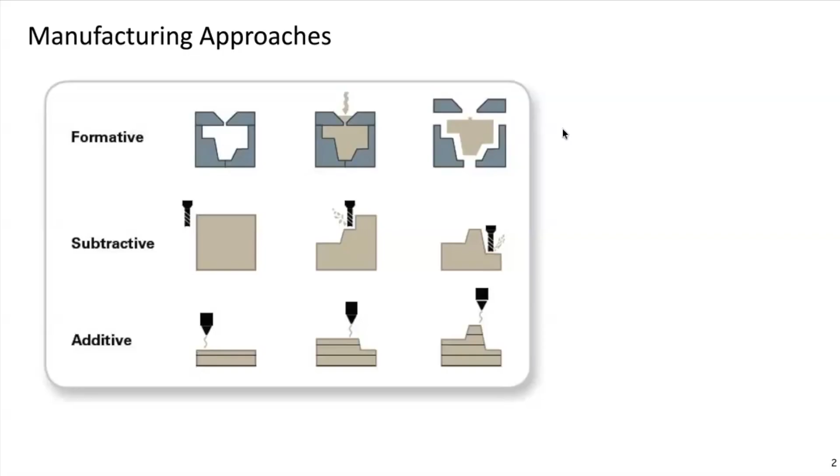I think at the end of the day, what's most distinguishing about additive manufacturing is making things you can't make by other techniques. That's the real power of this. And also think about this, it's pretty simple: you don't buy stuff you can't make. If somebody is not able to make it, you can't buy it. It sounds simple, but what that means is product design is often done with the tools that are available, and it's hard to push innovations when you don't have these kinds of capabilities.

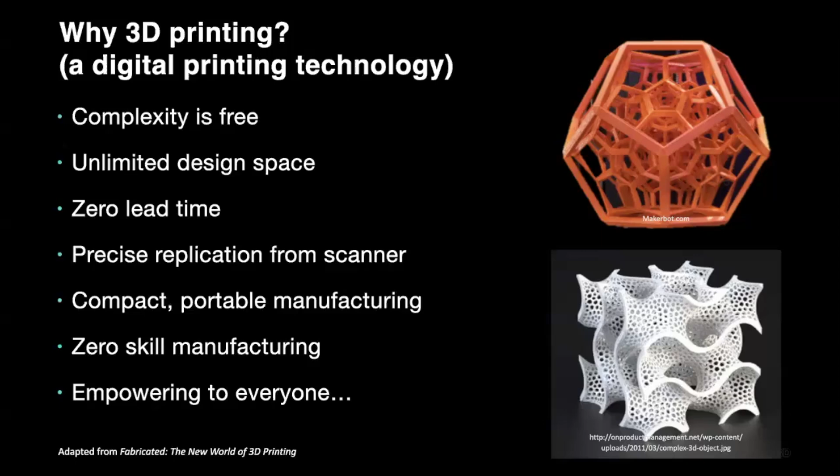So when you think about why 3D printing is so powerful, I think of two themes. One is making the unmakeable by traditional techniques. The other is scaling bespoke products to the millions, where each one's a snowflake, each one is unique. Think about dental products and other things having that scale. Those are the two use cases that I think are the most powerful.

And we ended up figuring out an idea to do this. It really started with a breakthrough in material science, which harks back to the first chapter of my independent career in making fluoropolymers. We basically designed a 3D printer that...

...has a window at the bottom of a reservoir that's like most windows. It's optically transparent and lets light in. But this window is also permeable to oxygen. Oxygen is an inhibitor to free radical polymerization. So you think about what is a material that you're all familiar with that's optically transparent and permeable to oxygen. Some of you may be wearing them now: contact lenses. So this is a cousin to contact lenses.

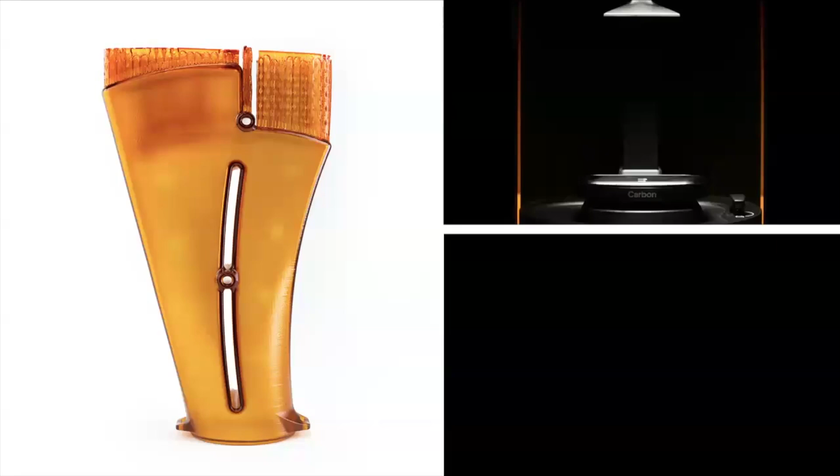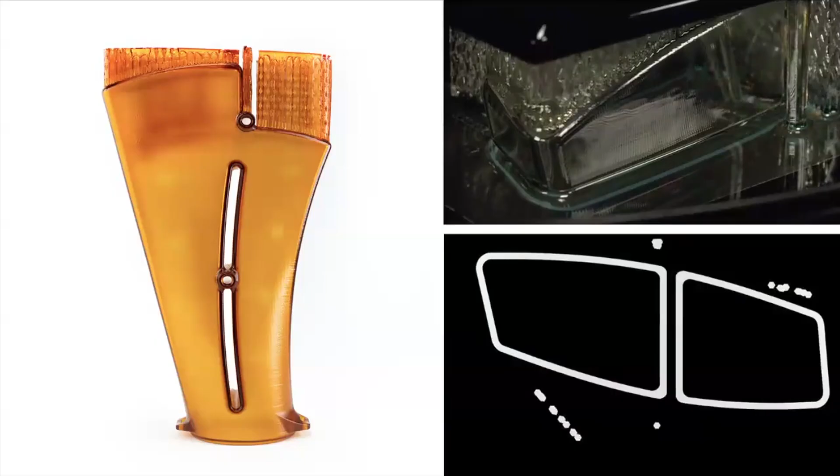What happens is we're going to lower a platform into this reservoir, and it's going to submerge underneath a partially UV curable liquid. It's going to get very close to the window, and then we're going to start projecting light, a pattern of light which represents a cross section of the object on the left. That first layer is going to cure asymmetrically. It's going to bond to the platform, but not bond to the window because of the oxygen coming through the window. There's actually a gap between this part and the window that's submerged under the resin. As the object pulls up, resin is getting sucked into the gap between the part and the window.

And this allows the printer to go 100 to 1,000 times faster than a traditional 3D printer. Most 3D printers, it would glue to the window, and then you have to fracture it off to create a gap to bring in more resin. So this is a mechanism for resin renewal at the interface of the part.

Here's an actual image. This is optical coherence tomography. We put a contrast agent in the resin so you can see the flow of liquid that's forming, and you see there's a negative pressure in the middle of the part as it's drawing resin into the gap. That gap is about 20 to 50 microns, depending on how we run the printer, and it allows resin renewal automatically. This allows a printer to go substantially faster.

We've worked out all the details. It's complicated. It requires a software control system, and it requires hardware that's remotely controllable with software. And you can imagine so many things differ depending on which resin you're using.

So we have over 50 different resins now, because you need resins with different mechanical properties. You need resins that are elastomers, rigid materials, flame retardant materials, impact resistant materials, different dental materials. Every resin's got a different viscosity, a different optical density, different mechanical properties. Every resin requires its own batch of software.

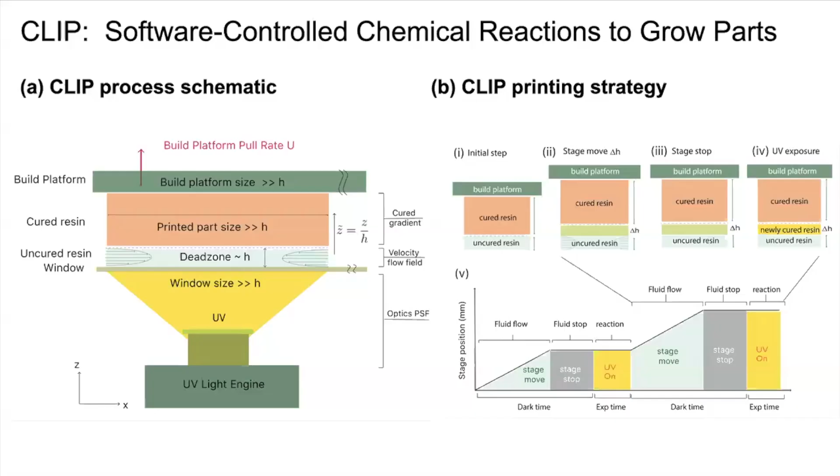Now you can imagine as you pull this part up and you draw liquid into the gap, that's kind of like drawing liquid up a straw. So atmospheric pressure plays a role, and we have to control all these printers because the printers operating in Denver operate differently than the printers at sea level. So in order to do that, you need connected products. All the telemetry is coming into headquarters, and we're able to keep the printers running this way.

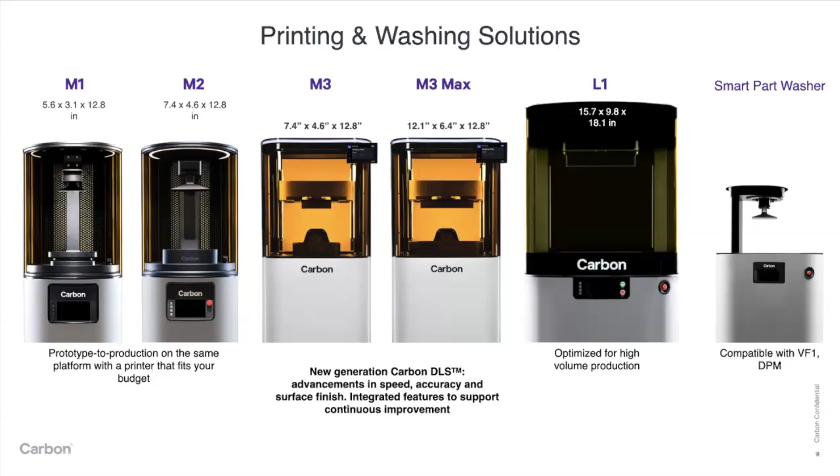So this is a suite of printers that we've commercialized at the company Carbon. And this is not an AI image, this is a real image. You have to say those things now, right?

So you get the point of having automated hardware allows us to run all day long. And that's really valuable. So that's a little bit about the process and the hardware.

Let me talk a little bit about the chemistry. How many people have bought epoxy glue at your local Walmart? And what does the packaging look like? It's like two containers, right, usually with one plunger, maybe two containers. They get the stoichiometry right. This is step growth polymerization chemistry, and it's all weighed out so that even engineers could do the chemistry. And I say that as an engineer and a chemist.

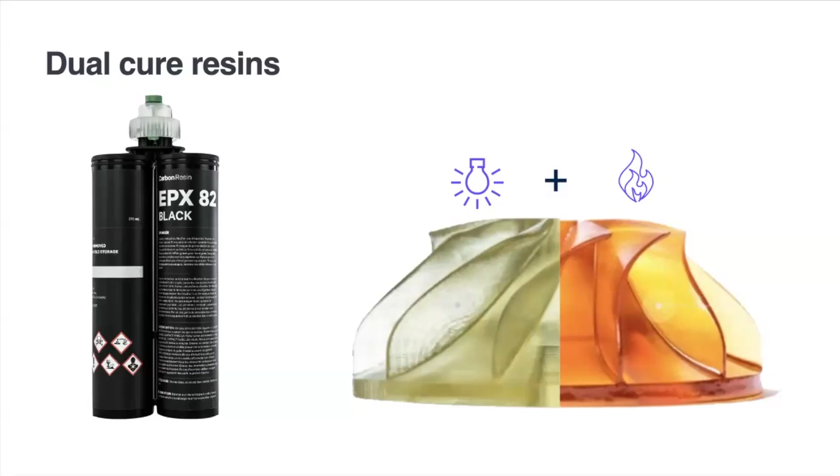But that's how you get most great polymer properties. Light is not a good way to make most polymers, but it's a good way to shape a polymer. So we basically developed orthogonal chemistry—we have chemistry that's going to go on with light, and then we have other chemistry that's going to go on by that mixture, and they can run independent of one another, so they're orthogonal.

Just to show you one chemistry slide here: we basically have about 10 volume percent, and only about 10 volume percent of the chemistry is light sensitive, free radically activated, and that will set the shape of the part. So we'll print a part, and it's mechanically not very strong, it's fairly weak. Then we get the excess resin off the part, and then we induce the second stage chemistry—here, epoxy chemistry. It's basically a solid state polymerization in the form of the part, and that's how you get great material properties.

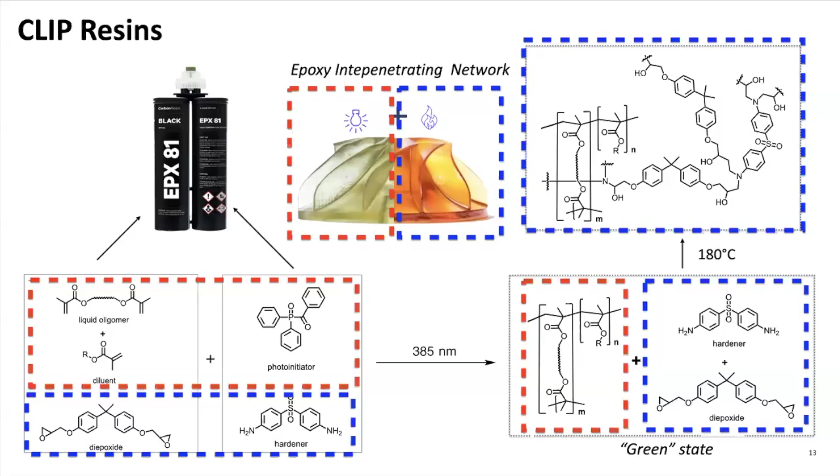So we basically broke it into two problems: shape the part with light, and do a second stage solid state polymerization. And this works like a champ. This is how we get amazing properties in lots of different areas. So I want to just quickly show you some products—Adidas running shoes. There's another great video here.

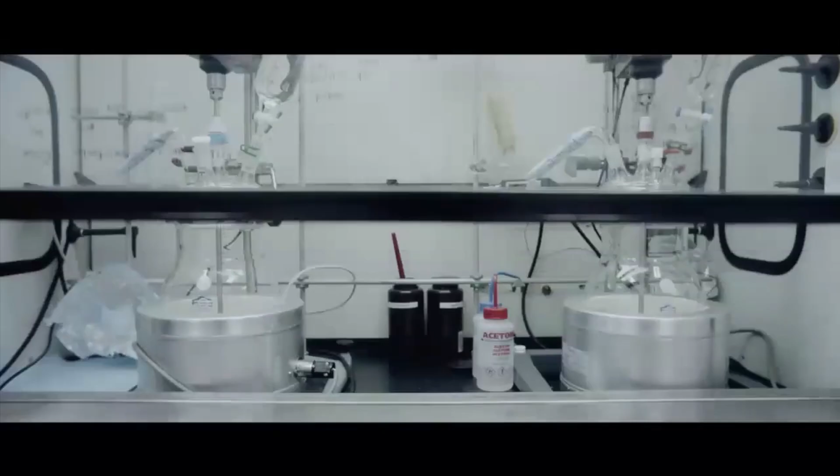When we first started with the idea of Futurecraft, because it's a guidance, it's set up on a path. It's a mindset and it's a philosophy to try things. We're always bringing in new influences, new ideas, new collaborations. 3D printing, for example, was one of these new technologies that really had unlimited possibilities. The initial problem was, okay, can we actually make a running shoe out of 3D printing material that really works and works well? So when we started thinking about doing 3D printing, we wanted to use liquids because liquids give you the most flexibility in material design.

I think of light as a chisel. Light triggers the solidification of the liquid, but oxygen inhibits it. That allows us to have the object grow. What's really interesting about this collaboration with Carbon is we're seeing convergence of a completely new manufacturing technology. We're going to scale it with the best industrial partner in business. We're able to deliver tens of thousands and move into hundreds of thousands and into the tens of millions. Now that's clear in front of us. We have this amazing opportunity to innovate the printing process. The liquid rising and growing in that context can give you new design thoughts you've never had before and new performance capabilities that wouldn't be possible by traditional manufacturing.

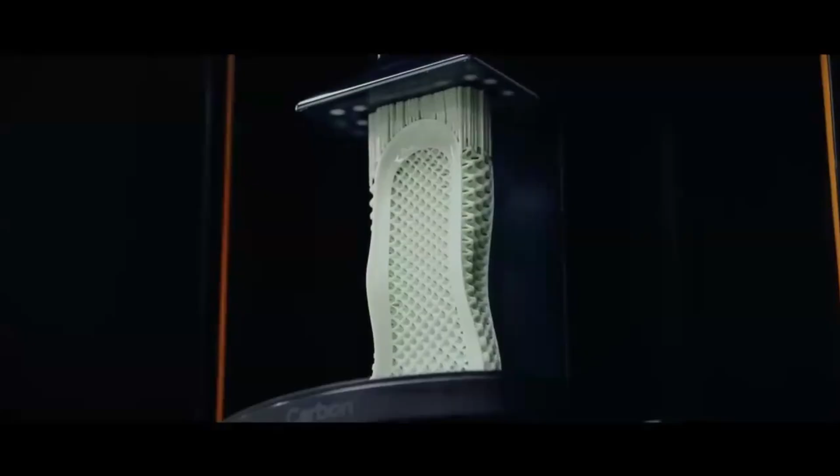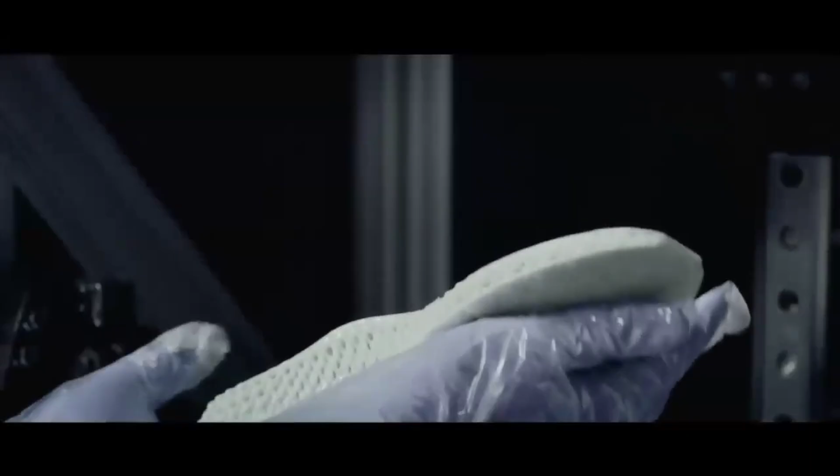This three-dimensional mesh structure, it's a lattice, it's a matrix, it's a web of individual elements. Each one of those little elements is tuned specifically for a purpose. These lattice structures behave quite differently than anything we've dealt with before. They're much different than foams. Now we have every individual area of the shoe to work with, which is a completely new horizon for us and a new venture. If you really want to make a shoe that's a size 9, that same shoe for someone who's 180 pounds versus 100 pounds has got to be different. We can go in within every single cell and engineer that exact cell to do exactly what the consumer needs it to do just for them.

That's fascinating. That's going to change how we create products and certainly how consumers experience products. And I think that's how we see something like Futurecraft 4D playing into the life of an athlete. I would say this is just the very beginning, and it sounds silly and cliche, but who knows, man? I don't know what's next, and that's what's great about going to work every day.

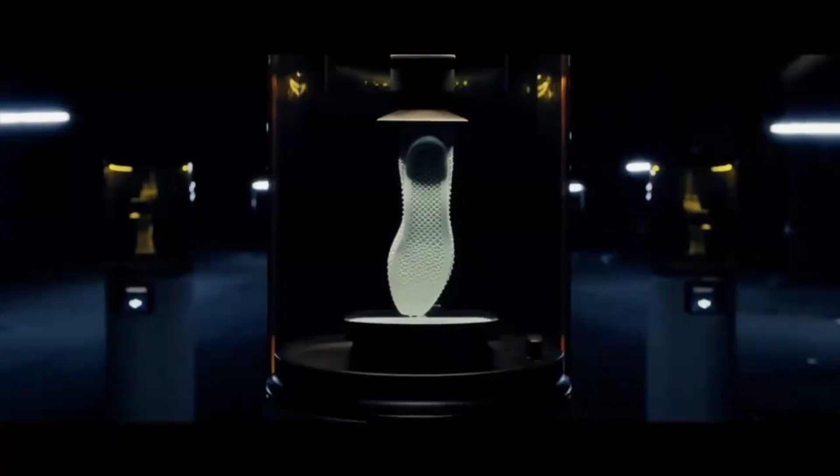Adidas is great at marketing. I just.

Yeah, so it's coming out in all different brands now, in different types of shoes. These were just launched. The whole shoe's printed now, and it's been a lot of fun. And when I spoke in that video back in 2017, tens of thousands to hundred thousands to tens of millions, I was speaking it into existence. We weren't close to those numbers, but we knew we could. We knew it was fundamentally possible, but we had a lot of work to do. And we were literally in the thousands at that point. So that talks a lot about projecting something of where you can go. And now we're in the tens of millions.

And when you think about that kind of conversion, the shoes, when they first launched, were $300 a pair. And all the chemicals were bought at low volumes and they were expensive. But as you get to larger volumes, you knew where the math was going to go. And so it's trajectory, having the trajectory to understand those dynamics. Now you can buy them for less than $100 a pair. And at less than $100 a pair, you can sell 50 million shoes a year. Those sorts of things.

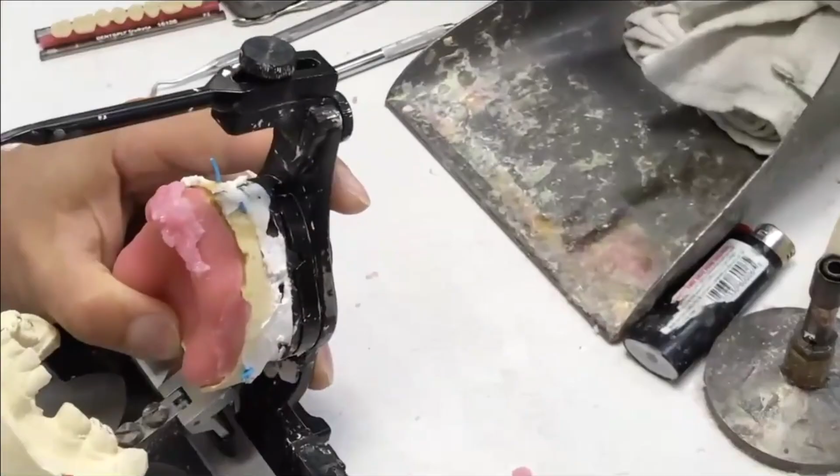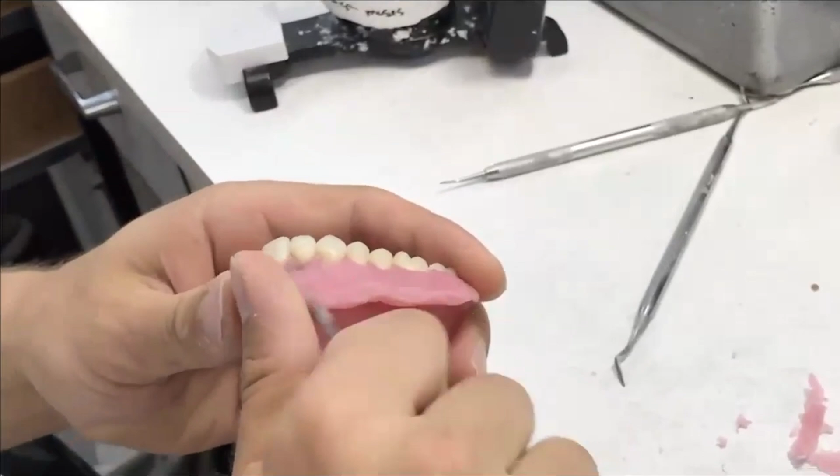The VA is the largest provider of dentures in the United States. And I don't know if you've ever seen dentures made. This is the way they're made. They're handcrafted. They're expensive. And it typically takes 8 chairside visits to get them right. Because you try them on, they get adjusted, but you just look at this process. And I want you to watch this process because you just get a sense of this is how it's done. And again, it's 8 chairside visits.

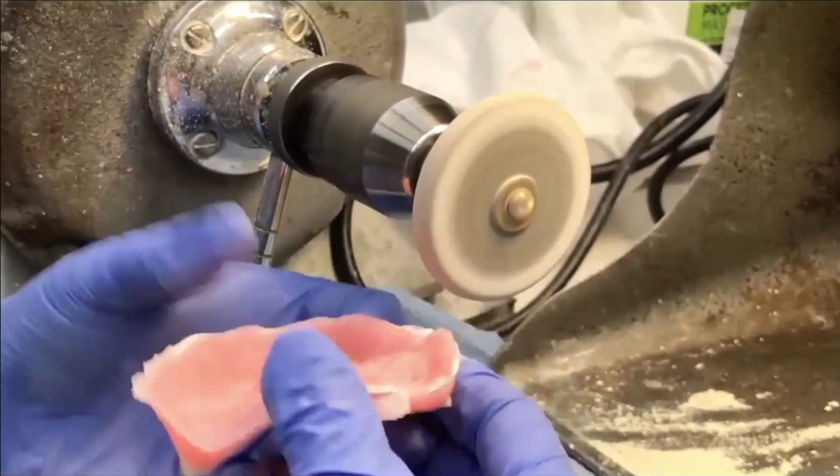And I was giving this talk up at MIT, and one of the department chairs there, she started crying during my talk, because her mother's got Parkinson's disease and she lost her dentures, and she had to go back into that chair 8 times. And it's a huge toll on people to get this done and get these milled. But there's a better way. And here's a description.

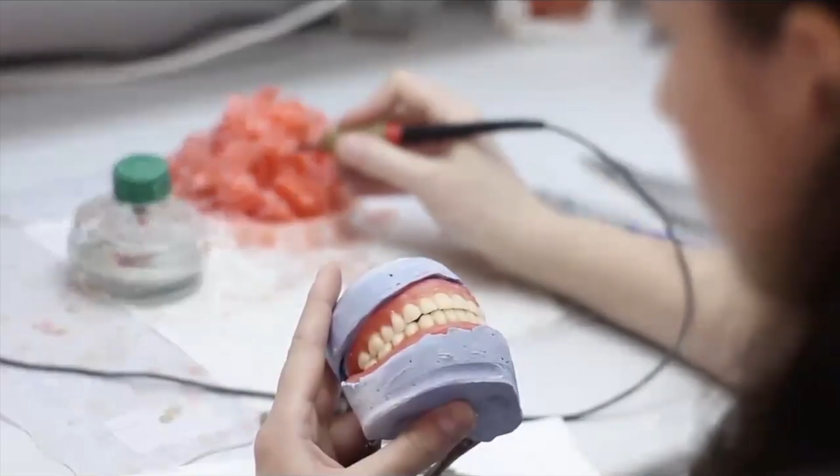For the last 45 years of delivering dentures or longer, there was always an unknown. When patients are looking for a denture, the biggest complaint is that they don't fit. And think of denture making as a craft. I need a craftsperson. And Carbon can do it.

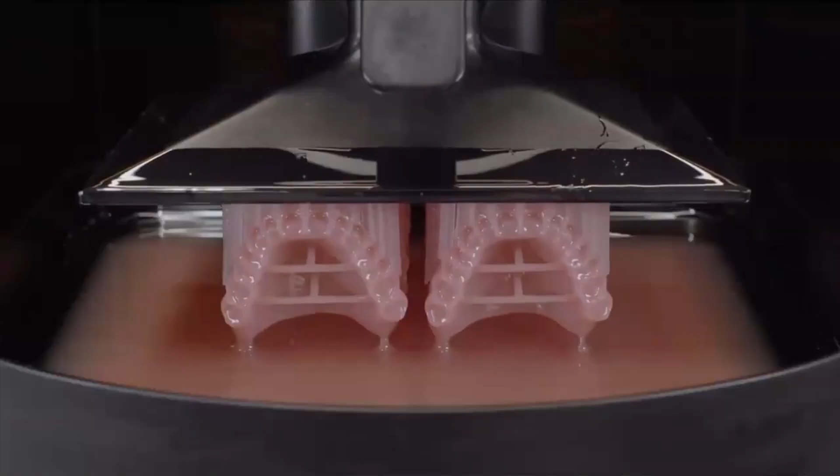Taking a lot and making it less is what a mill is. Taking nothing and making it something is what a printer is. We don't want to make molds, we don't want to make jigs, we want to make final products. And when you make final products from the milling process, it is far less economical than when you make final products from the printing process.

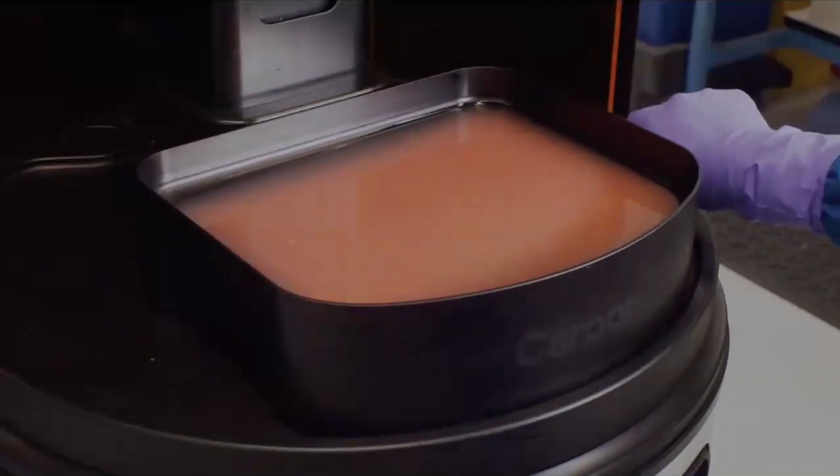There's 3 basic things. There's fit, there's comfort, and there's function. 3D printing brings all of those together. The accuracies and fit, comparatively speaking to what was done even 5 years ago, has become so much higher in impact for patients and for clinicians across the country. For something that makes dentures day to day, it's transitional, it's transformative. A lab powered by Carbon will allow me to make probably the best denture ever made.

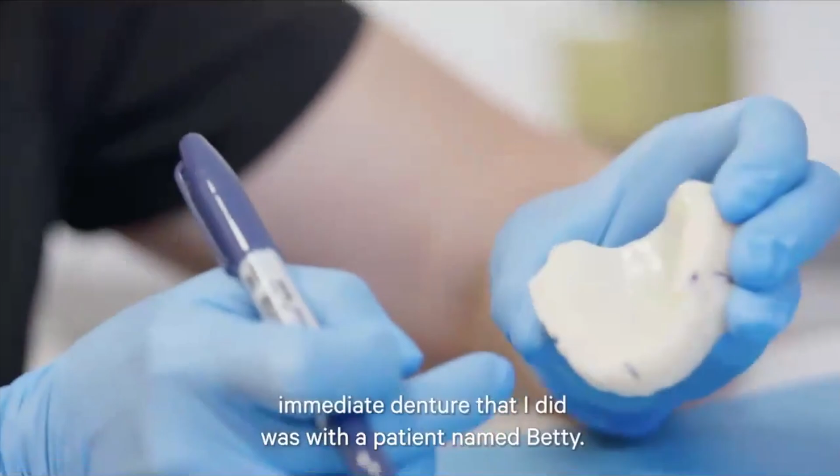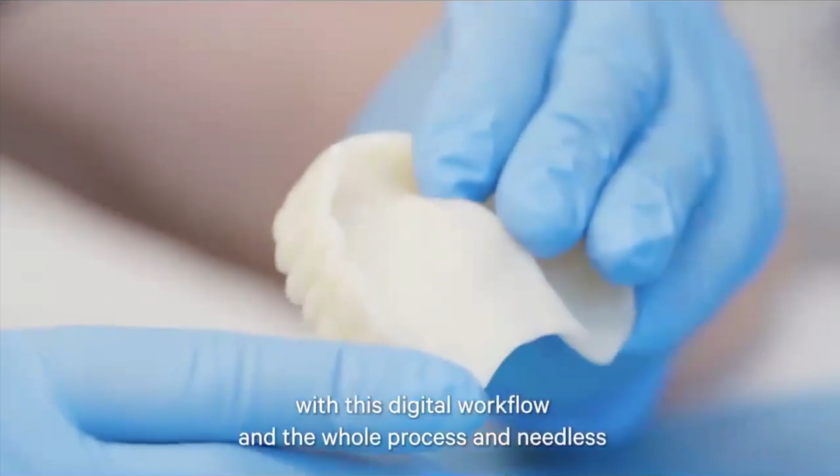My first immediate denture that I did was with a patient, Betty. I was still kind of a newbie with this digital workflow and the whole process, and needless to say, models matched, everything went like clockwork perfectly. She comes back 24 hours later for her post-op, and she's standing in front of this big mirror we have in the office, and she looks at herself, and we're looking at her like, Betty, you are beautiful.

And she just starts to cry. And my whole office, we're all holding our breath because she's staring at her face with her beautiful teeth. And then she says, no one's ever told me.

So it's all done with intraoral scanning. Some people still do impressions and they get digitally scanned, but they're all done with a wand now. I'll pass one around. Don't get wigged out, it's not mine.

But the teeth are printed separate from the base. We've got 5 different color bases. Sometimes you put ceramic teeth in there too, sort of a la carte, but it's transformative. It's significantly cheaper and it's the same materials made better and made more accurately. It's really transformative.

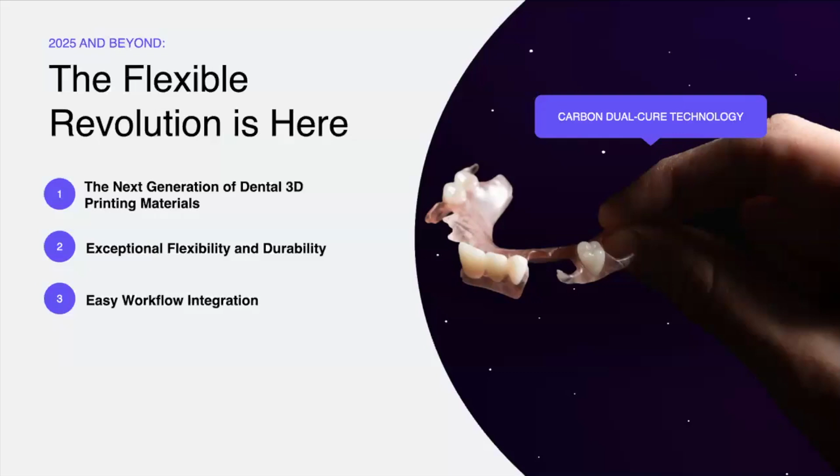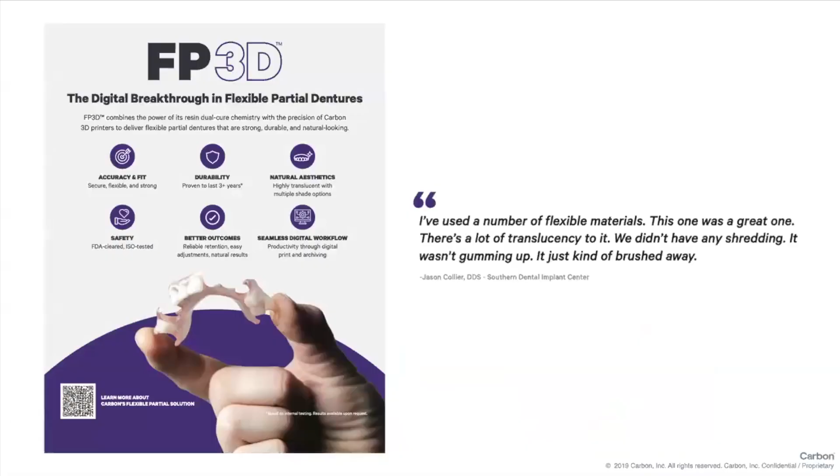And the new resins now, these dual cure resins, give you the mechanical properties to now do partial dentures, removable partial dentures. And this is the biggest part of the market. So the advances in materials open up these kinds of constructs. And we've got the entire portfolio now to cover this entire market. So just to walk you through that, I'm going to skip that video.

Helmets and head protection. This is me reliving the glory days of high school football. Your head gets scanned. They're bespoke products. Software creates the scan. The lattices are generated by finite element analysis models tied to mechanical properties of elastomers. Helmets get ranked. They actually get ranked by the NFL at Virginia Tech. Virginia Tech does all the rankings. It's an amazing facility. 7 out of all the top helmets are made with our technology.

And at the NFL, they're bespoke. This started off as a small market. They do 250,000 helmets now a year. So it's really gotten into peewee and the whole 9 yards, pun intended. And again, back to the video and the positioning. I thought being here at Arkansas, I got to show this video here.

If you love football, so much more than that. It's the hope of 2 small towns separated by a patch of grass under lights on Friday. It's generations of families who sing the fight songs, wearing the right shade of red. It's the cold of aluminum bleachers and the heat of century-old rivalries. It's the 2-a-days in August and the sting of catching a pass in January.

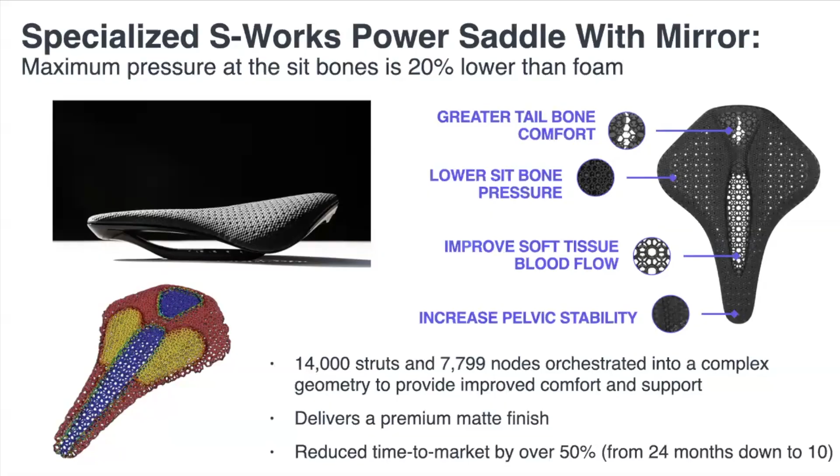It's really eye-opening. And in other areas where this matters medically. I've never had to, but when you have to live in a chair all day, every day, you need to be comfortable. It's a nice addition to life.

My name is Brian Minnick. I'm the CTO and co-founder of Cool Seat Company. We developed the world's most advanced seating systems. When we started the Cool Seat Company, we realized there was a gap in existing technology. Through our development cycle and research, we identified Carbon as a suitable candidate to replace foam. And so with the Cool Seat technology, we've been able to address some of those concerns.

We got a sample pack from Carbon. It wasn't until I held it in my hand that I was like, oh, this is it. This is what I'm gonna make a seat out of. I've been on a variation of a Cool Seat for the last 4 years, and I don't want to sit on anything else. What I found with the Cool Seat was it didn't take long to break in. It contoured very well to my profile, and then it stayed there.

I've been on this cushion at least 2 years. I've traveled the world, I've been all over the place. In that time, I've never had to worry. It's very comfortable, but it's also very stable. If I give a push, I get a stronger push because my body's not shifting as I'm on it.

Quality of life is why we started this company. The end user has to make so many choices of what they can do throughout their day, and having to think about your cushion or how long you can be on it or the restrictions it has. You want to eliminate that concern from the user, so it's one less thing to have to worry about. You literally forget the benefits of not having to think about that piece of equipment. In fact, my mind is quite free, which is something that I have yet to experience in any other piece of equipment I use.

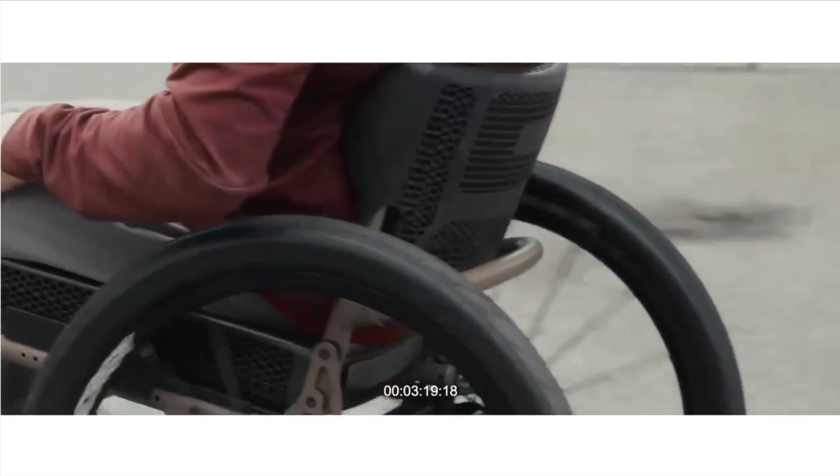The environment that Carbon's created allows small companies such as us to embark on a journey like this. It traditionally wouldn't be possible in conventional manufacturing. Without Carbon technology, this is impossible.

So what I wanted you to see here is this: there's a tenet in entrepreneurship in Geoffrey Moore's book, Crossing the Chasm, about the bowling alley. You know, what is that first bowling pin you want to knock over that cascades into the other pins?

It started with Adidas running shoes, right? Great brand, visibility, expensive products in the beginning, but as scale grew, the cost came down and allowed other things to fall. And so then bicycle saddles and helmets and now seating, and now it's going even further into high volume consumer products.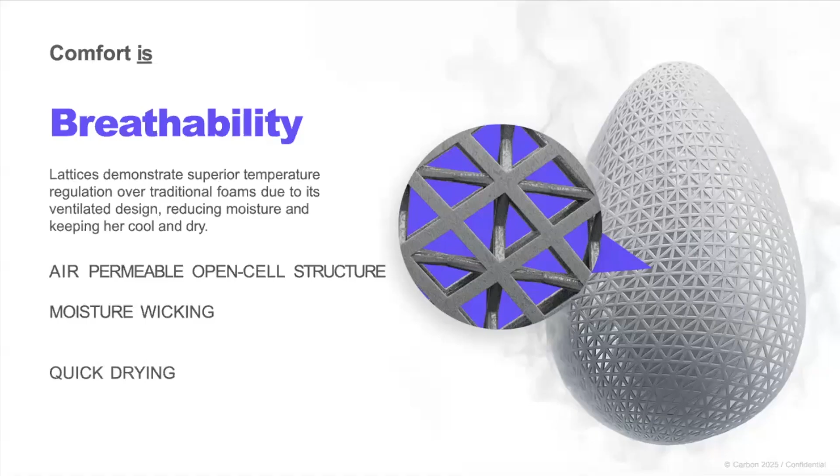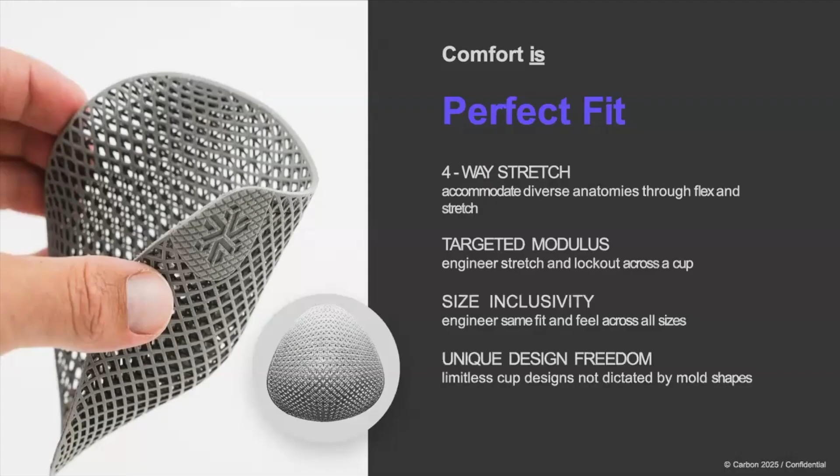And back to the tenets, this is probably the most engineered lattice and material we've got. This resin's got air in it, so it's a very lightweight, breathable lattice. There are major products being launched this holiday season in this marketplace. As these markets grow, costs come down, and it really opens up. Most of these products are fabricated in Sri Lanka, so you have to think about your global supply chain—there'll be about 1,000 printers going into Sri Lanka just because that's where these products are made. Shoes are made in Southeast Asia, so it's really interesting dynamics going forward here.

So that was one of the tenets I wanted you to see in this cascade of products as you open things up. As was mentioned, I started off at Carolina and NC State. I led the company for 6 years. My son's the CEO now, and I got my life back as a professor. I stayed on the West Coast. I'm on the board of National Geographic, and I chair the board of my alma mater, Ursinus College. I got a chance to restart my academic career.

You think about where you're going to play, how you're going to win, what's next. The thing I fell in love with at Carbon was manufacturing—where manufacturing is done and those who do it. So I started thinking about what's going on in the academy that was of interest. There are a lot of amazing things happening in universities, and the things I really treasure are next generation products—a lot happening in wearables, tissue engineering, sensors, medical technologies.

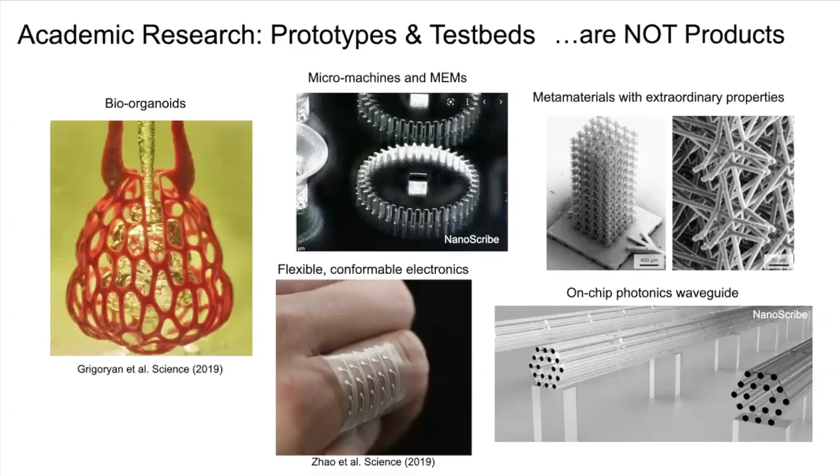What's also clear to me is that the tools we use in academia to prove a point—the manufacturing and fabrication tools—are really great at making one-offs. But there's probably no path to scale up, because the tools used don't have those capabilities. They're often direct-write tools. And back to what I said: you don't buy stuff you can't make. It's going to be hard for these to actually become products without better manufacturing tools.

So I began to think a lot about what we did with making things with light at a resolution of 75 microns, powering macroscopic objects. Then I landed in Silicon Valley, which is making things from 1 micron down to single-digit nanometers. But there's a really interesting gap in making things between 1 and 1,000 microns that I thought—why don't we mine this area?

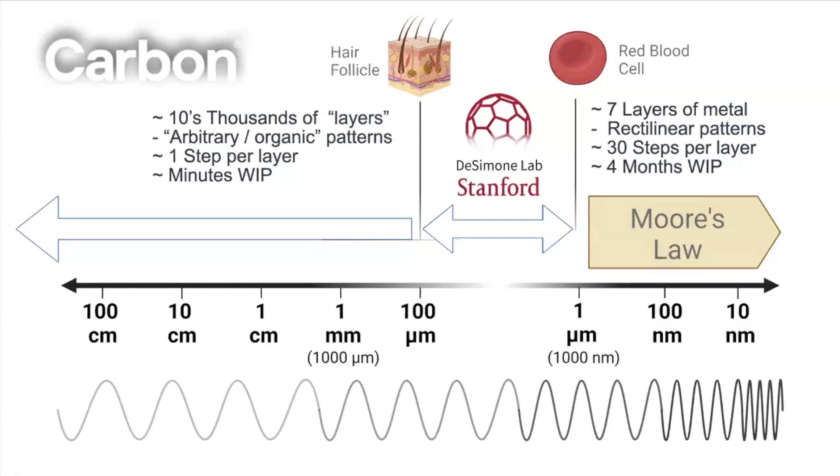So again, back to how one thinks about strategy and research—I identified this gap in making things with light in 3D, because 2D is the microelectronics world. A wafer is in process for about 4 months in a fab, and it takes about 30 steps per layer. There's only about 7 layers of metal in a top-end chip nowadays. They're very precise in the XY direction and very thin in the Z direction. But we do things macroscopically—we need tens of thousands of layers because they're bigger, and you can only have 1 step per layer. You have to think about the Z-axis far more than you do in electronics.

So we decided to jump into this gap. Now, with my engineering students at Stanford, we decided to build printers with very high resolution in the XY plane. That's pretty easy to think about—you just put more pixels per unit area, done with optics and software. We were immensely successful at that. This is a 75 micron resolution printer we did at Carbon. Then my students started building printers down to 30 micron resolution.

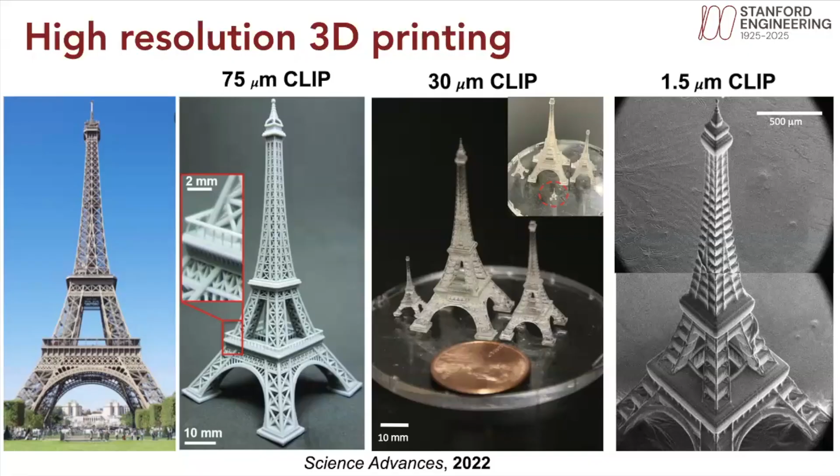And see that little guy right there? We built a printer with 1.5 micron resolution using the same chemistry and physics of the CLIP process with that oxygen-permeable window. But don't look too closely, because it's not really good in the Z-axis, which is what we need for 3D printing. I'll come back to that.

We figured that out by actually integrating—let me show one slide on that, for more of a technical audience than I sometimes get. So we developed a process where we're basically going to be injecting resin through the part.

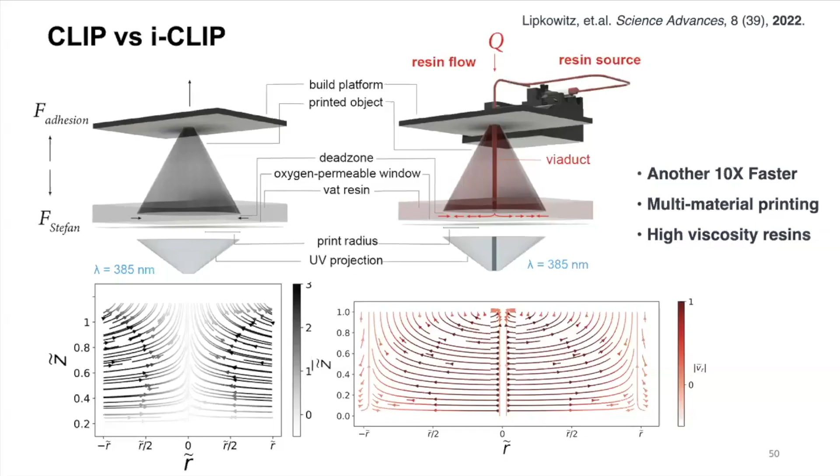Instead of resin coming in from the periphery, like I showed you, we're now mechanically pushing resin through the platform through a microfluidic channel designed into the CAD file of the part, pushing resin into that gap. That changes the fluid mechanics dramatically. Now we have a positive pressure under the part instead of a negative pressure, and this opens up the printer to go another factor of 10 faster with high viscosity resins.

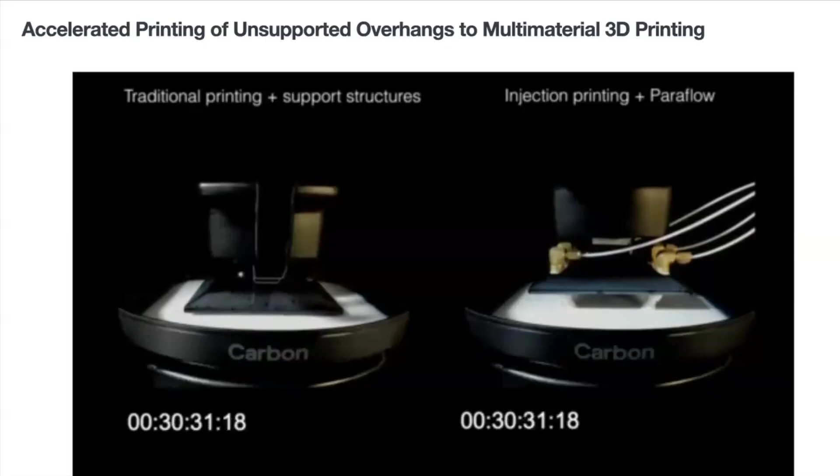You just see that we're basically pumping resin into this gap. All we're doing is modifying the platform; the printers are the same. Now we have fluidic channels through the platform, through the part. It gets us another factor of 10 in speed because the process is mass transfer limited. By pushing resin into this gap, it's now faster because the chemistry can go faster. There's a lot of fundamental physics that are different.

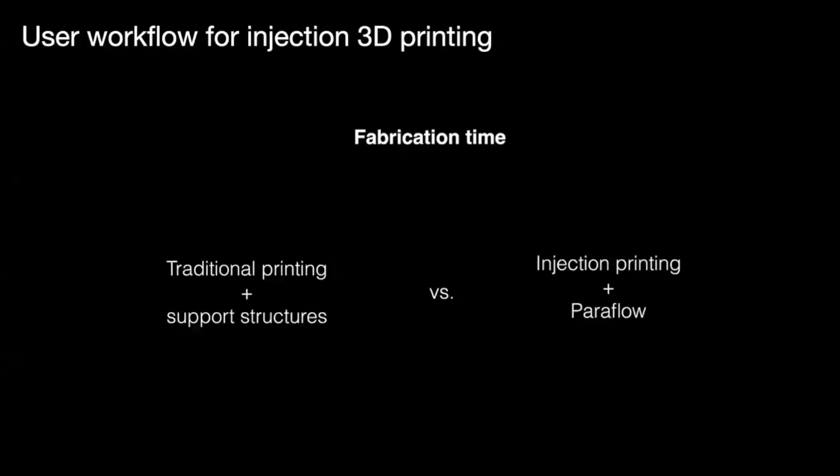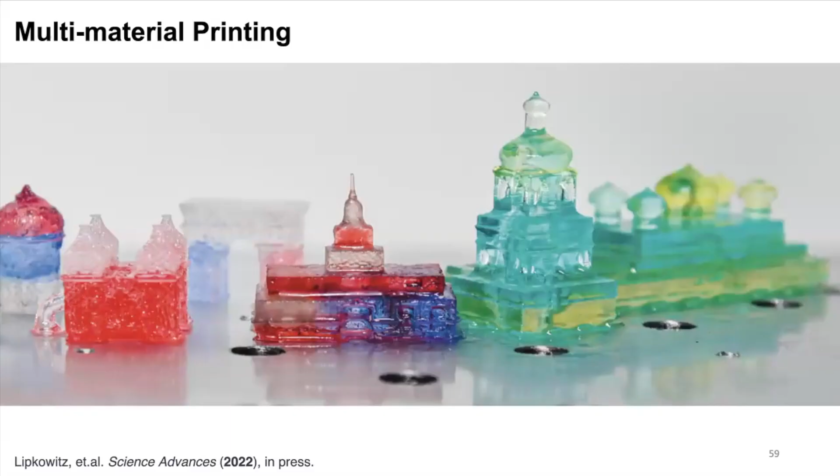You can see how now we can load up different resins and do multi-material printing. We have different colored resins, different kinds of resins, and we've integrated this with software to do multi-material printing. This opens up all these different kinds of processes—doing different colors and different chemistries in different regions, and the printers can go faster.

The key is that you push resin through the part, which keeps the negative space open because the resin's got oxygen in it, solving the z-axis resolution problem. We showed a year or two ago that we can now do, for the first time, 3D printing of microfluidic structures using light. Microfluidics have all been 2D, with rectilinear channels because you're using things like SU8 and molding technologies. Now we're doing free-form structures using light at the micron scale.

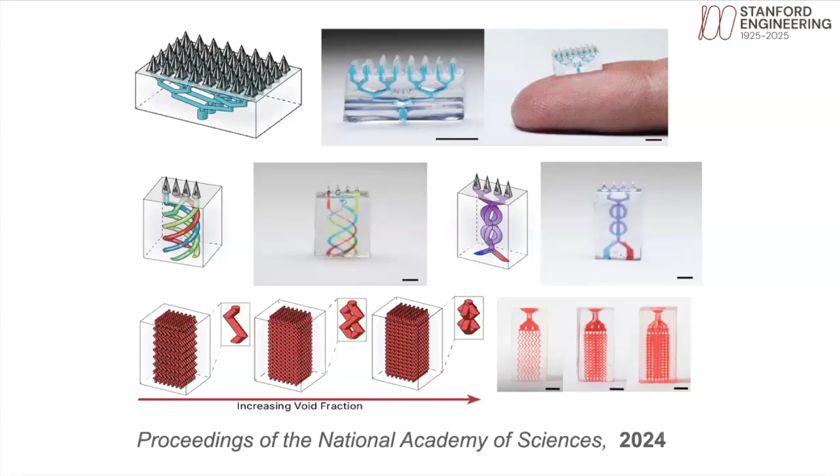Well, what can you do with that? We love trying to recapitulate the vascular structure for blood supply. We've invented a technology we call CAST, where we 3D print a water-soluble polymer into a very sophisticated lattice. We surround that lattice with a medium of cells and culture media, and dissolve out the lattice. Then we perfuse that structure with perfusates that are oxygen laden, including blood and synthetic blood.

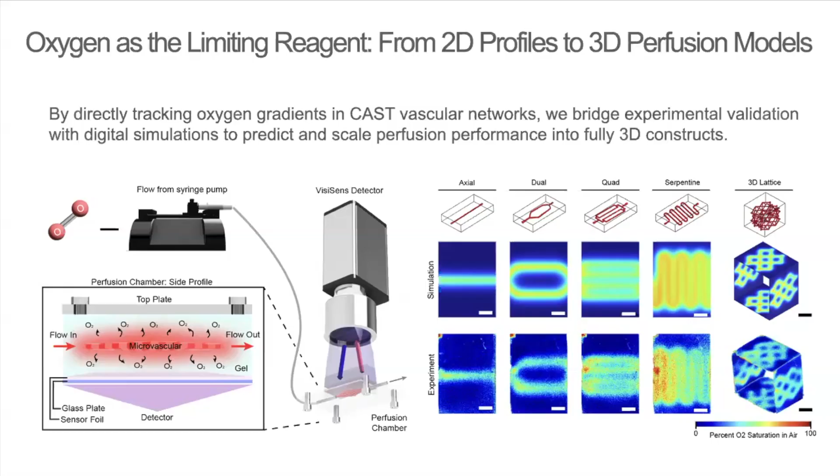We develop the tools to measure the oxygen transport through the block, and what we can find out is what do you need to do to keep cells alive. We start looking at live-dead zones, and lo and behold, cells need to be within 100 to 300 microns of a blood vessel to get the oxygen. That's the way we're designed, and that's what's needed here. So we're measuring the oxygen needed to support these cells.

If you've got cells that consume lots of oxygen, like cardiomyocytes, you have to feed them more than some other cells that don't have such oxygen demand. So we're now mapping out the oxygen load required by different cell types and what kind of vascular structure different tissue types need from a fundamental point of view regarding oxygen replenishing.

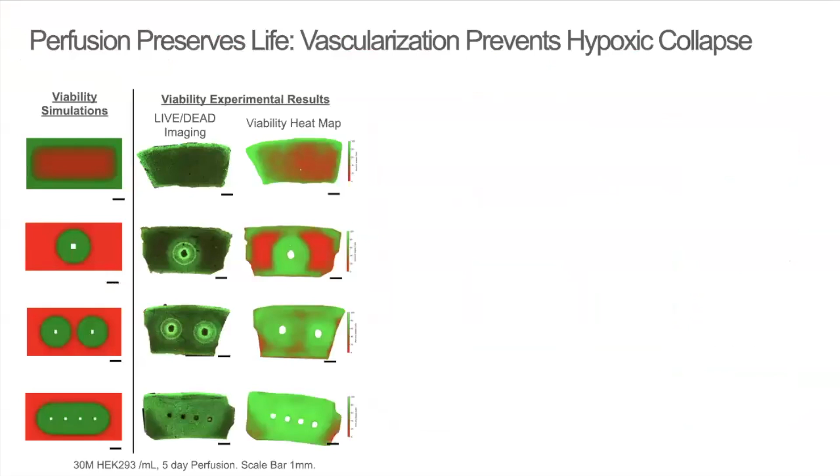We're having a lot of fun with this, and we're beginning to also keep other kinds of cells alive, like islets and beta cells. Can we get into devices that can impart glycemic function control by encapsulating islets and beta cells in these kinds of structures? This is where that's going.

Where else can we do microscopic printing that would be of value? We've been enamored with the microneedle space for a long time, in particular for vaccine delivery. What's really interesting is that the dermis of our skin has 100 times more immune cells than your muscle does, including the dendritic antigen presenting cells, which is the target for vaccines. In many ways, when we all get needles and push the vaccine into the muscle, we're missing where most of the cells are.

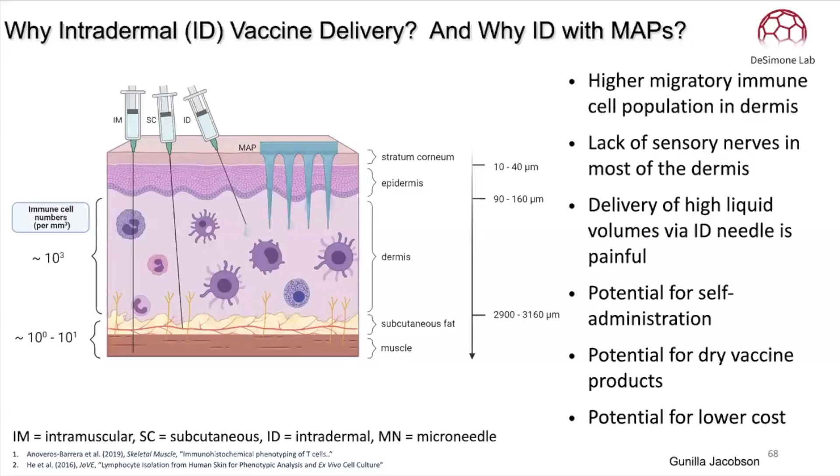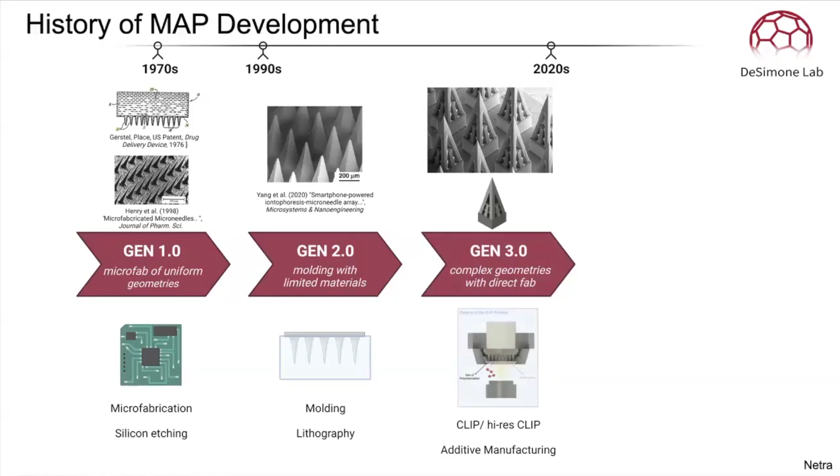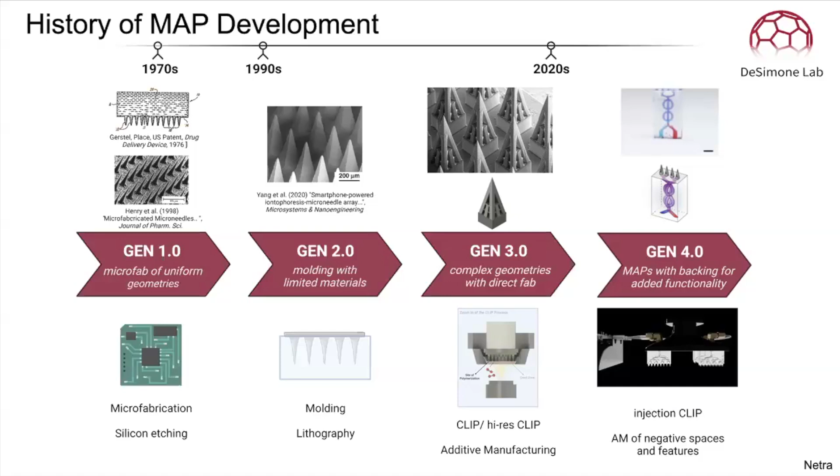Microneedles were designed a long time ago, but using the tools of the electronics industry—etching silicon. Then we and others started molding microneedles using imprint lithography tools. It opened up new materials, but the shapes were still the same because you had master templates etched in silicon. Now we call these Gen 3—3D printed microneedles. Combine microneedles with microfluidics and we call those Gen 4. This opens up the ability to think about new kinds of delivery mechanisms into the skin. One of these here happened to be during COVID, so it was really good timing.

What we found is you can deliver a vaccine into the dermis, the same amount of vaccine, and get a 50-fold increase in antibody response. There's a huge dose sparing. You don't have to deliver as much vaccine to have a really strong response.

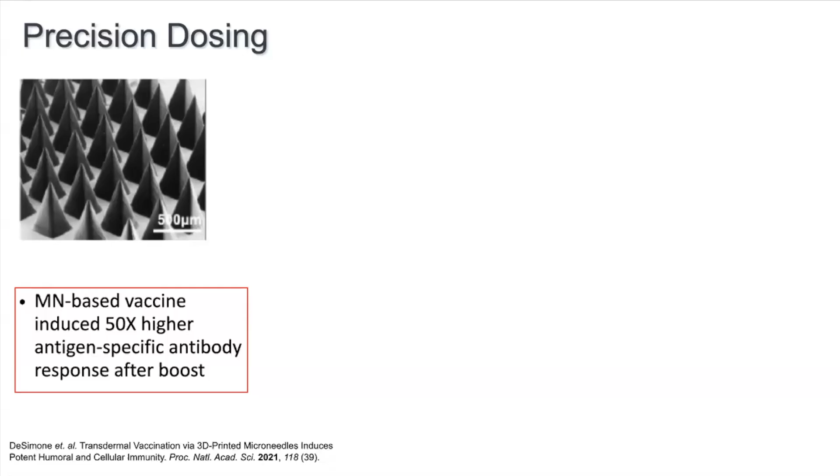And now with these new high surface area needles, we can actually trap liquids into that space through surface tension, and you can deliver liquids through a microneedle into the skin. Or more interestingly, you could freeze dry that liquid, lyophilize it in the needles.

Why would you want a dry vaccine? It doesn't need to be refrigerated. Remember all the issues of storage and refrigerators during COVID. What happens is you can push these vaccine products into a moist environment, and that moisture can dissolve out those products.

We've got big programs with the Bill and Melinda Gates Foundation for vaccine delivery. We're also combining this with microfluidics. Think about GLP-1 drugs and peptide delivery. A lot of biologicals, antibodies, proteins, and the like can't be co-formulated. Each of these biologics has its own pKa, and their secondary and tertiary structures are delicately balanced, so sometimes when you mix them, they aggregate and precipitate.

But everybody wants to co-deliver now. Co-delivering and mixing means you have to do stability studies for the mixture and every different stoichiometry out there—12 months, 18 months of stability. What if you could co-deliver without co-formulating? Keep them physically separate, but each has their own microfluidic channels to co-deliver, and you only have to do stability studies of the individual components.

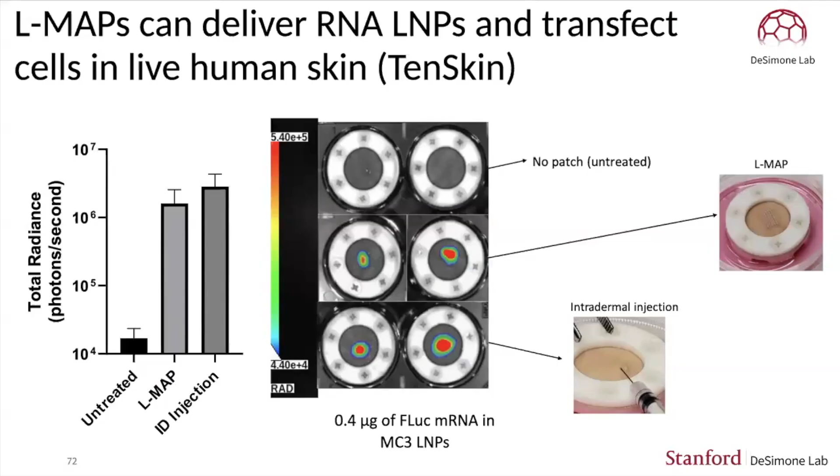So we are delivering all different types of vaccines into the skin. We have human surrogate skin doing messenger reporter genes. We're working with SARS-CoV-2, a self-amplifying RNA replicon type vaccine. We're doing measles and rubella with the Gates Foundation. We thought this was a third world vaccination issue, but now it's back here in the United States in a significant way.

So we're delivering live attenuated vaccines. And we just got renewed by the Gates Foundation, so we have a big program in this space.

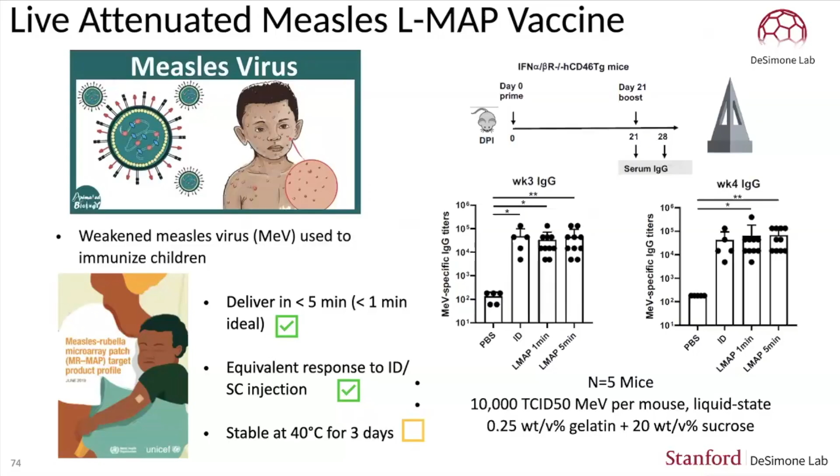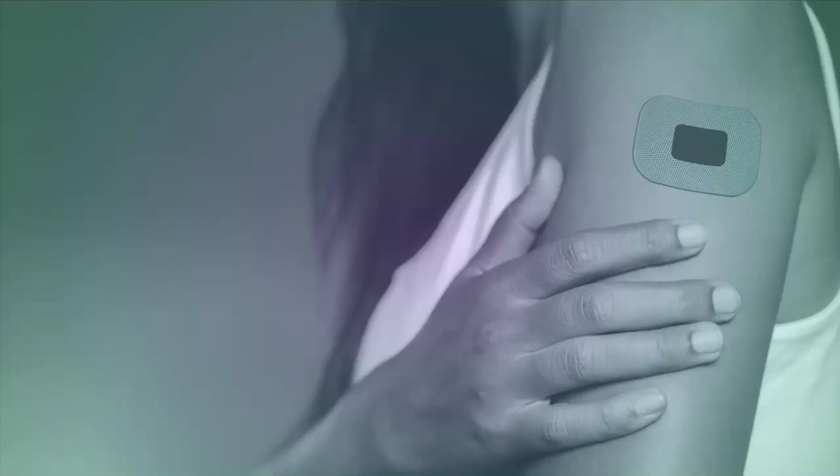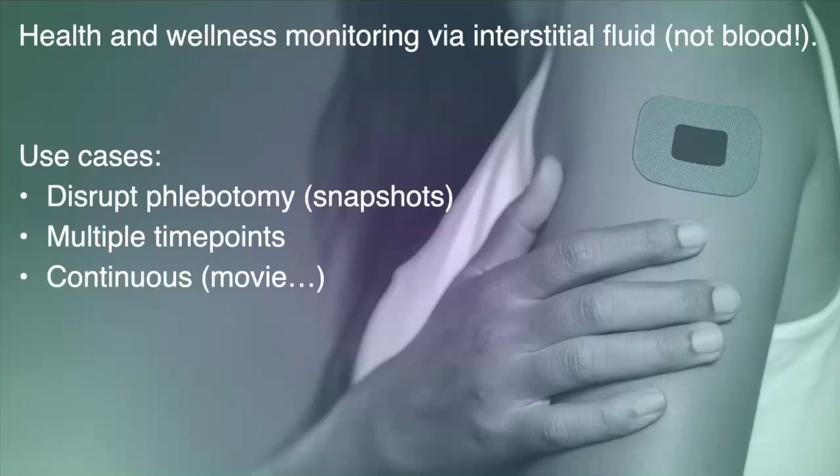Okay, last topic. How many people have heard of Theranos? Maybe they had it right, except for the fraud, and they went after the wrong circulation system. They went after blood. We are interested in interstitial fluid, the clear fluid in our bodies.

Let's look at this more carefully. We're 60% water as humans. Two-thirds of that fluid is in our cells, one-third is outside our cells. We have four times as much of that clear fluid in our bodies as we do blood. It's really interesting from a chemical engineering point of view, the physiology of a human.

I'm sort of looking at this from the outside, and clearly people are delivering drugs into this space and sampling it. Think about all the GLP-1 drugs going into the sub-Q. Think about continuous glucose monitoring, which took 40 years and $40 billion of investment to measure one molecule reliably. So it's a little daunting.

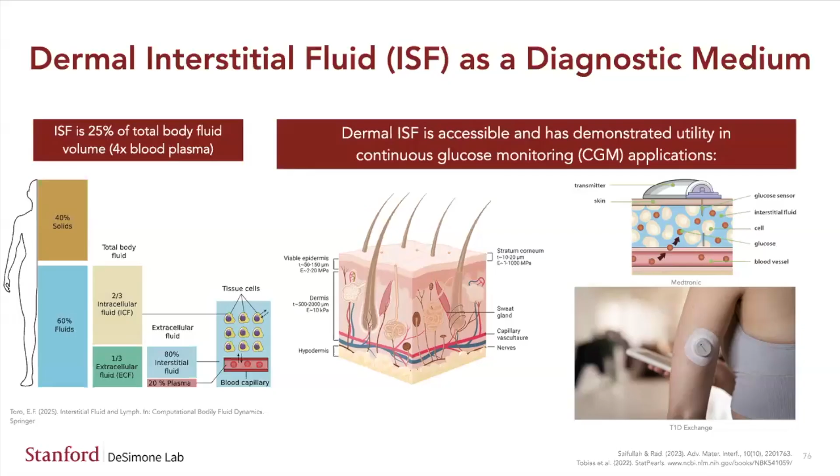But think about the body: the average adult now has about 20 liters of clear fluid supplied into this interstitial space per day from your blood supply, and about 17 liters of that gets reabsorbed back into the bloodstream. That excess 3 liters gets pushed into these lymphatic vessels.

So there's a pressure gradient from your blood supply through this space, where all your cells are. Your cells are not bathed in blood—blood is often like a highway, hundreds of microns away. You just need to get the oxygen there; it's not bathing your cells. Your cells are bathed in this fluid.

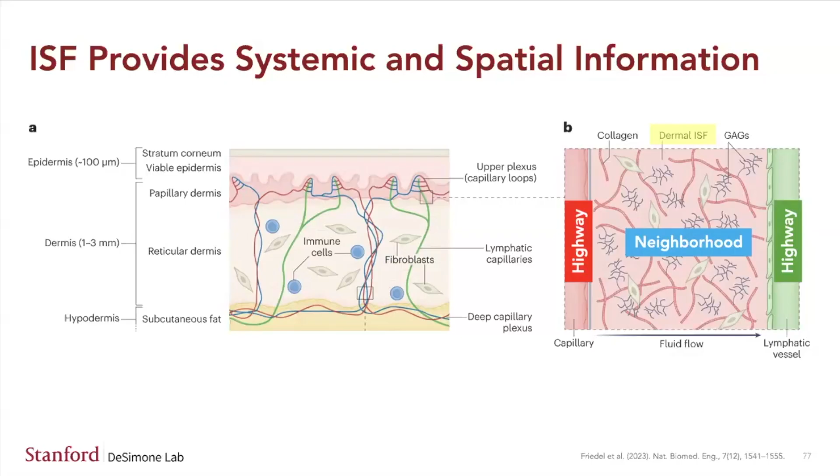Your cells are communicating—they're shedding molecules, shedding nucleic acids—and it eventually transports into these lymphatic vessels. Lymphatic vessels have no pump, no heart; it's all check valves. As you breathe and walk, it squeezes, goes to the next domain, the check valve stops it flowing backwards, and it all works its way up.

It bathes all your cells and has lots of communication molecules in the interstitial fluid space. Interestingly, 85% of your interstitial fluid—from your lower body, left thorax, left arm, left side of your head—all dumps into the thoracic duct and drips into the venous stream, into the bloodstream, where it goes off into a highway. The other 15%, from the right thorax, right side of the head, and right arm, drips into the right lymphatic duct into the bloodstream, and it's really rich in molecules.

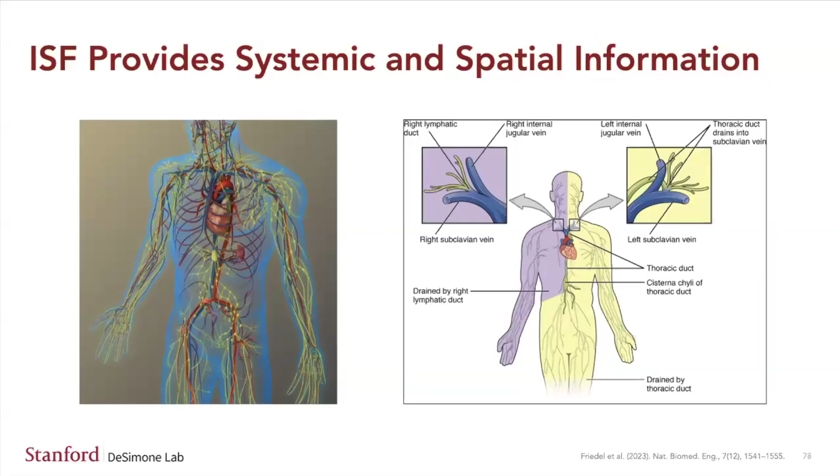You see lots of all the molecules you'd think about that are important in life, and they're at different concentrations than they are in blood. What's really interesting is they're amazingly different concentrations. Take nucleic acids, for example. There's about 12 times more exosomes found in interstitial fluid than in blood. Exosomes are often the little cargo containers for DNA and RNA.

One of the hottest areas in science right now for oncology is circulating tumor DNA, ctDNA. When they say that, you should think people are saying blood, because it's all collected in blood. Well, your blood gets loaded up with nucleases that chew up DNA. The half-life of ctDNA in blood is about an hour and a half. But it takes a long time to get there, and the concentration of nucleases in interstitial fluid is really low, so it's there much longer.

When you think about oncology, there's something called an opportunity window: when you find the disease, how quickly can you fix it? Ovarian cancer starts on the edge of the fallopian tubes, and people talk about it a year or two before it gets to the ovaries, at which time it metastasizes in about two weeks. It's too late. You got to catch it earlier. You need to open up the window. The earlier you find things, the bigger the opportunity window to do something about it.

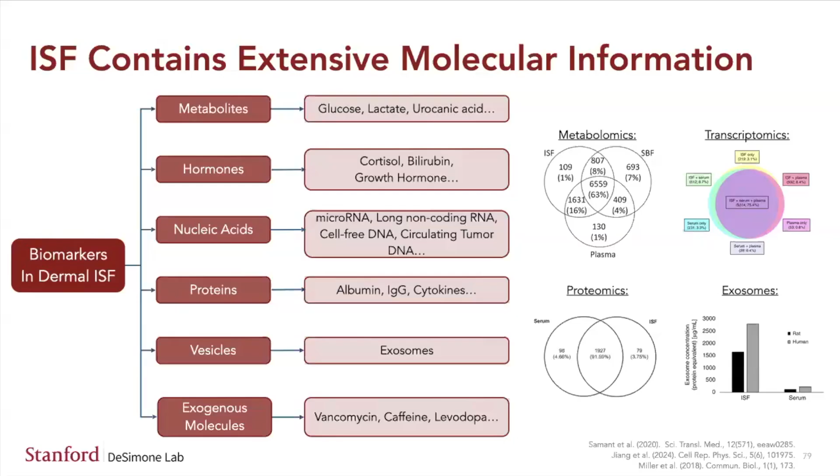So we are really eager to do this. But collecting this interstitial fluid has been a nightmare. Nobody does it. Nobody's had their interstitial fluid collected. I have, because we've invented new techniques for doing that. And you look at the techniques for doing it, it's a complicated thing, even though it's there three times as much as your blood. Blood's easier to collect, but it's got its own drawbacks.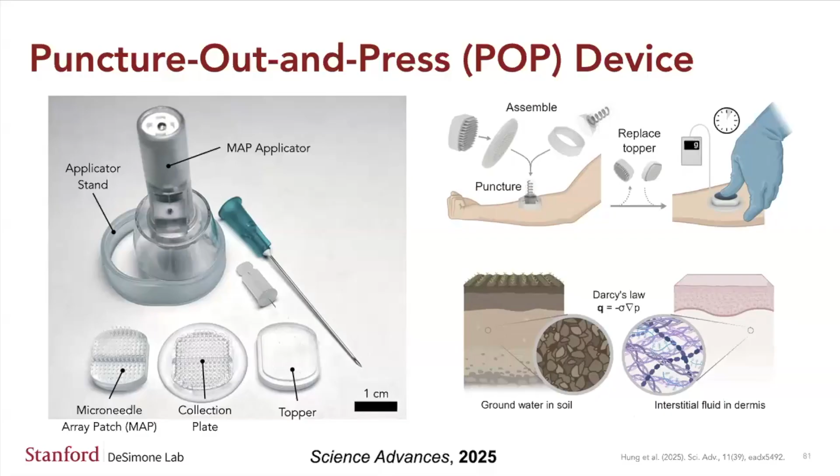People have been talking about microneedles for doing this for a while, but they haven't had much success, because it's hard to make what you want to make. It's hard to make microfluidic microneedles. But now we can. We just published this paper late last year with a new design that uses Darcy's law, the fundamentals of collecting groundwater. We've applied this technique, done all the computer simulations for showing this, and now we've entered humans at Stanford.

We wanted to measure the pain scores. So from 0 to 10, it's a 1.2. It doesn't hurt. You feel it, but it doesn't hurt because it's above the nerve endings in your skin. We collect, on average, 15 milligrams of interstitial fluid in 5 minutes. This is substantially higher than anything in the literature.

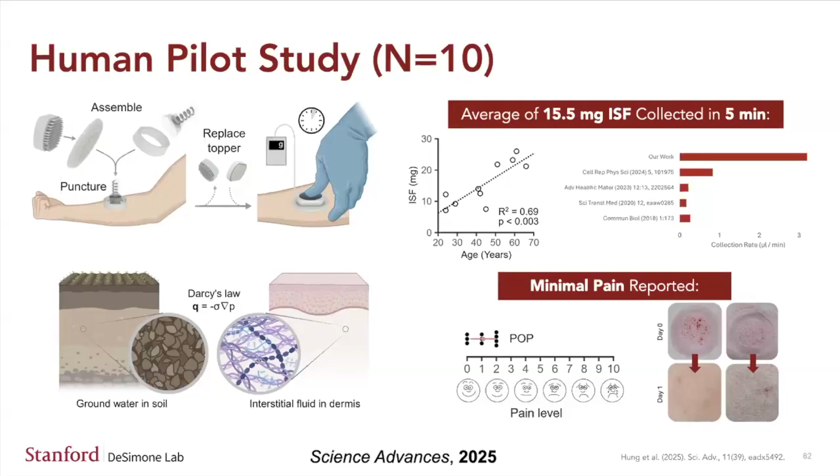There's lots of different kinds of molecules, and we're beginning to mine all the different molecules. We started with mass spectrometry, a known technique. We see about half the protein load in interstitial fluid than you do in blood. Blood's got a lot of albumin in it, but the distribution outside that is really broad. We see over 3,000 proteins by mass spectrometry.

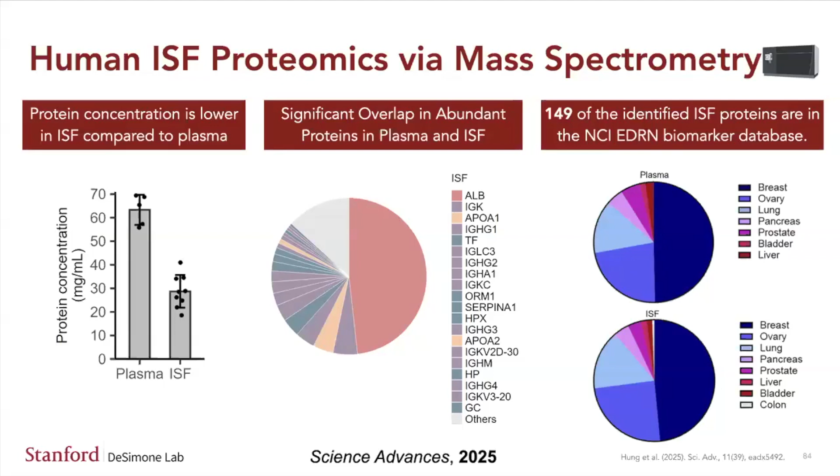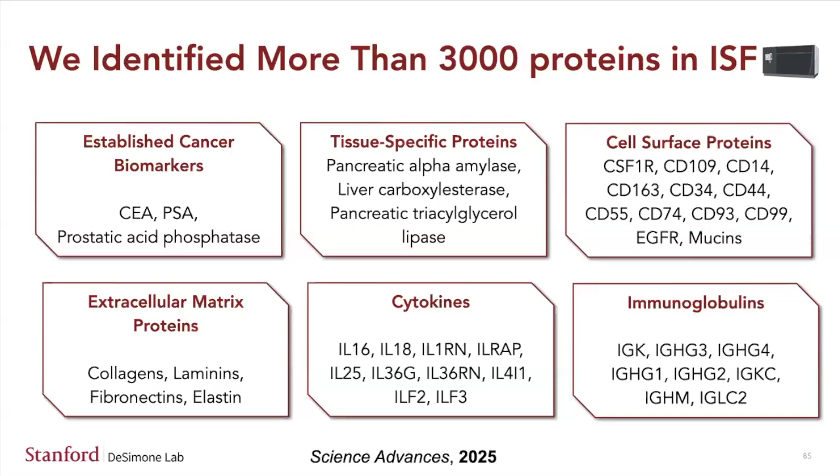And we see 149 proteins associated with early cancer detection. We see PSA, we see PSA in forearm dermal interstitial fluid. So there's some interesting transport stuff I don't want to dive into right now, but we see all the cancer markers. We see lots of tissue-specific proteins, a lot of cell surface markers, a lot of extracellular proteins, a lot of different cytokines, and all the immunoglobulins. So we're beginning to mine this now.

And the challenge with that first device is you had to hold it on for 5 minutes. It wasn't that convenient. We had to have a person do it for you, right? So we've got a new device that we're making.

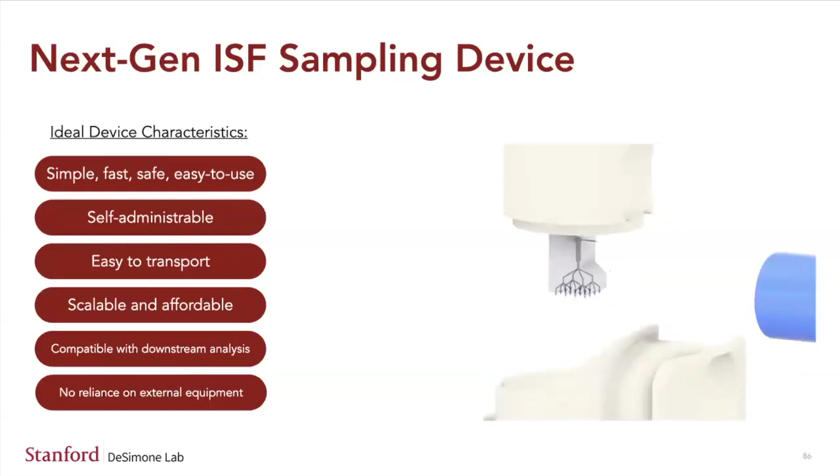It's all 3D printed. I don't have the needles in here. We just got this IRB approved.

So basically, it's a 3D printed device. The connectors between this button are all designed of a certain diameter and a certain number based on the material properties of the 3D printed resin, so that a certain force will fracture and give you a certain velocity to push the microneedles into the skin. It just punctures the skin, and we do that with a guide and then we have to hold pressure on it.

But now what we want to do is, basically, you put this in, and now we're using a vacuum instead of pressure. So these are dirt cheap, they're sold by Becton Dickinson, it's what they use to collect blood. You just put that into this device, peel off the adhesive, put this on your arm, make a really good seal because that's important for us, and listen to the click. That's all the force needed. It's calculated.

We've got paper on that. Then you insert the vacuum, and it engages the needle. Now that's the delta pressure for collecting interstitial fluid. You can wear this for about 5 minutes, and you collect up to 15 milligrams. When you break the seal, the air flows and pulls that into the collection device. It doesn't get collected in here, it gets collected in a little pellet before this. This is just a pressure rate.

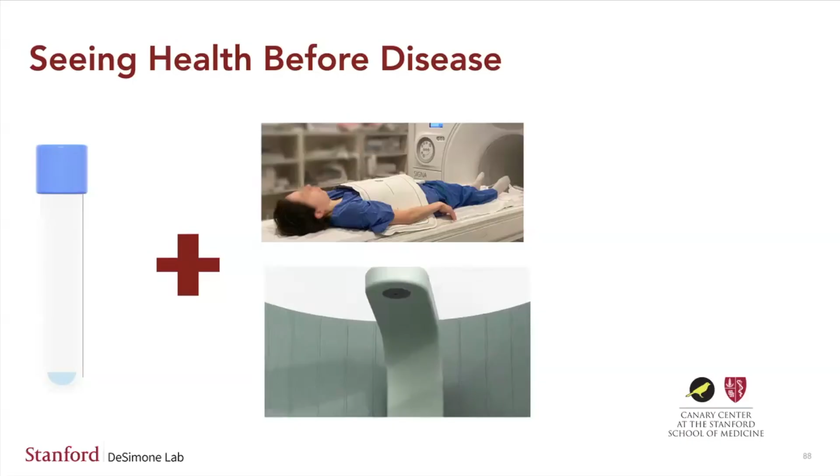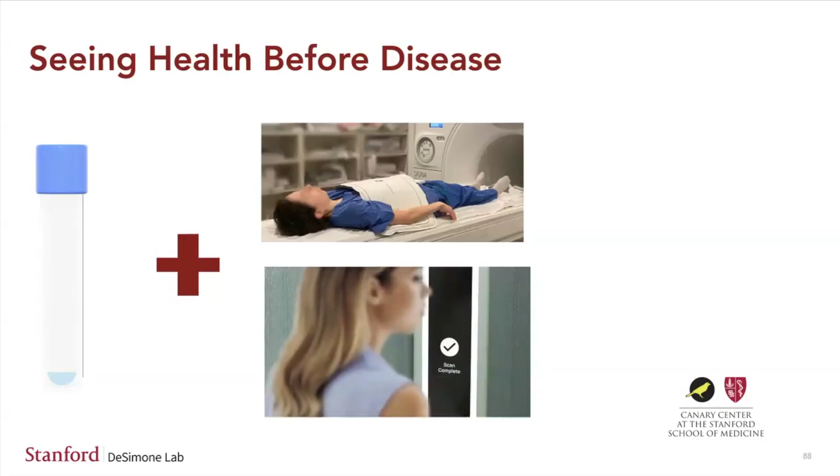It's much more convenient, and when you get molecular information at this high frequency, you can combine this with imaging technologies. We're working with a lot of different types of new imaging technologies at Stanford. I'm trying to help my colleagues bring on a whole body skin cancer detection system, like walking through a TSA booth, using low cost optics, AI, and image stitching together. We also have a big program to do magnetic resonance imaging as an alternative to X-ray mammography: high throughput, using a blanket with local coils, a low field 0.55 Tesla magnet instead of 1.5 or 3 Tesla, and no contrast, using diffusion weighted imaging MR.

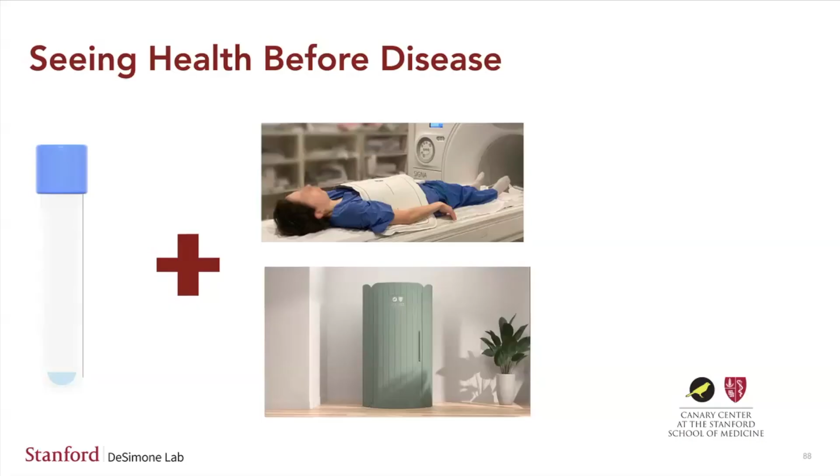When you combine molecular imaging or molecular analysis with imaging, and stitch that together with AI, this is the future of medicine. These are the pipes that collect the data. AI can tell you what the treatment plan is, or what the diagnosis is, or how to stay healthier. It's really powerful, and I think we're in a really exciting time period.

At Stanford, we just got a new IRB study approved for Alzheimer's. We see the p-tau217 protein in this interstitial fluid, an early marker for Alzheimer's. So you put people in the right regimen, the sooner you see the onset, your treatment probably will change. A lot of cancer therapies are late stage cancer therapies. As you get earlier, you're going to treat things differently. So this whole idea of early detection and what the treatment plan should be opens up, but it's this power of seeing things earlier, more thoroughly, powered by AI, that's really what we think the future is.

So let me end there. I'm really fortunate to have a great group of students with a lot of different disciplines. The convergence of disciplines is the key, as you all know. It used to be your I-shaped people are just really deep in a subject, or maybe T-shaped, deep but can collaborate. Now it's comb-shaped and pi-shaped. You've got to be deep in multiple disciplines. If you're going to do vaccines, you need to know material science, physiology, immunology, and that's what's so exciting today.

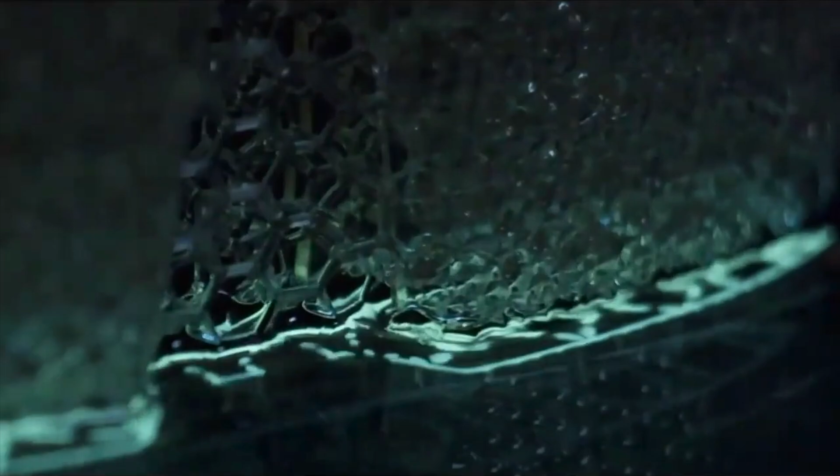The team at Carbon really showed the way to commercializing 3D printing at scale. At the end of the day, I'm a big fan of making things with light. It powers the entire microelectronics industry in 2D, and I think 3D is going to catch up and will be the way to make things. It really disrupts supply chains too, enabling all sorts of onshoring and the like. So think about this bowling alley concept: where you're going to play, what's that first pin, think strategically about how you're going to cascade that out. I'll leave you with that thought, and I'd be happy to answer any questions.

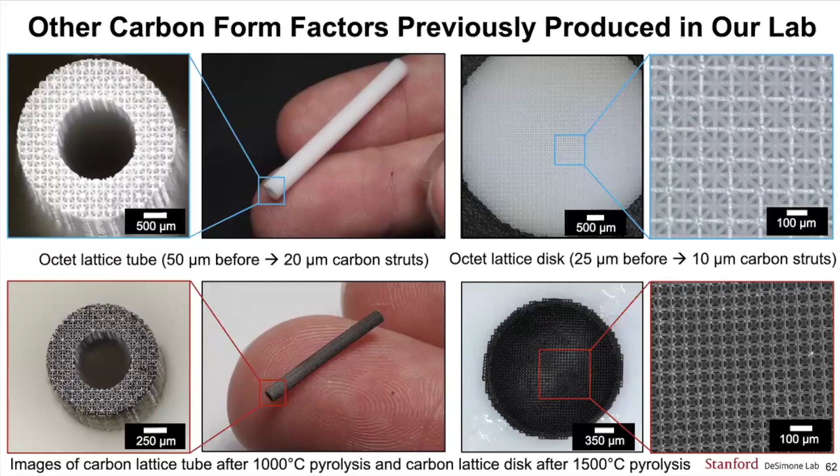And it's oriented. Nobody pyrolyzes three-dimensional objects because you can't get the gases out. You need a high surface area. This is like a stitched fiber, three-dimensional object. We have the surface area. So we started pyrolyzing these now, and we're designing materials that basically become carbon, elemental carbon, graphite. And you can see these objects, they're all graphitic. And we're doing triply periodic minimal surfaces, gyroid-like structures, all made out of carbon.

These are being used for electrodes for batteries. We got a big DOE grant in that space. And the newest one just came out this past week. These are targets for nuclear fusion, which fell in our lab. It's kind of funny. I'm talking about like sampling blood and doing nuclear fusion. But that's what's fun being at Stanford.

But the National Ignition Facility in the United States pounds deuterium, hydrogen, deuterium, tritium with 192 lasers in a little pellet. And that gives off more energy than it took to power the lasers. It does nuclear fusion. And this is what the targets look like. We're 3D printing the targets. These become sponges for hydrogen and deuterium.

And a utility scale reactor will be pulsing these pellets at a frequency of 1 hertz. So about 85,000 particles a day hit with lasers pulsed on that target, getting energy each plume. That's how this is going to work for next generation nuclear energy, the fusion, and they need targets. So this is carbon. We also put in silicon and other refractory elements. We make refractory materials, silicon carbide, silicon oxycarbide. We're putting catalysts in there to do hydroformylations, sort of chemical engineering, catalyst stuff.

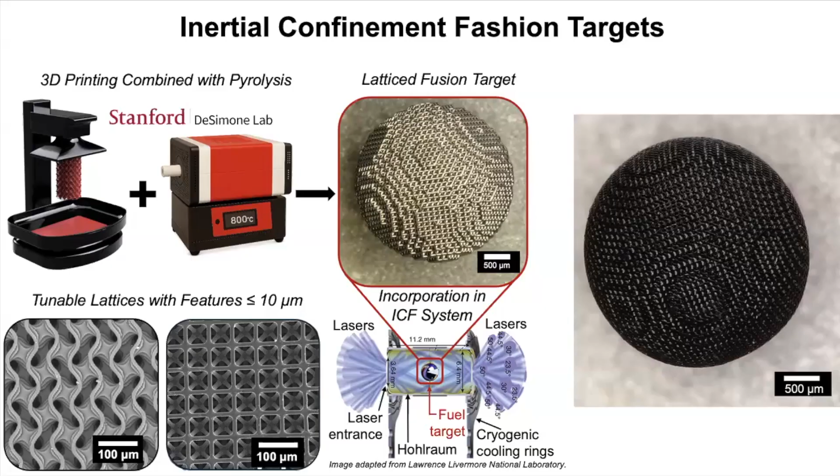Couple of questions. One is about the vaccines that you talked about with microneedles and the dependence on the dry vaccine. Is that work that's happening independently and you're designing a delivery system, or is it integrated, where these dry vaccines being developed are coordinated with or require your delivery system? We're trying to integrate it. It's both.

So these are our new ones. This just got funded by the Gates Foundation yesterday. This is a triply periodic minimal surface. So how do we get vaccines to release very quickly? The triply periodic minimal surface has got the highest surface area per unit volume. We 3D print these, so it's got wetting. And then watch this video. It does wicking.

So we see this as, okay, we're going to make stuff happen with this now. So we fill our needles with vaccines this way, and then we lyophilize that. But it's also a great structure to grab more interstitial fluid too, in combination with the delta pressure. So we're now massively going down this path. We're making things that are unmakeable, and we see something like wicking in a microneedle platform that can wick through the whole thing.